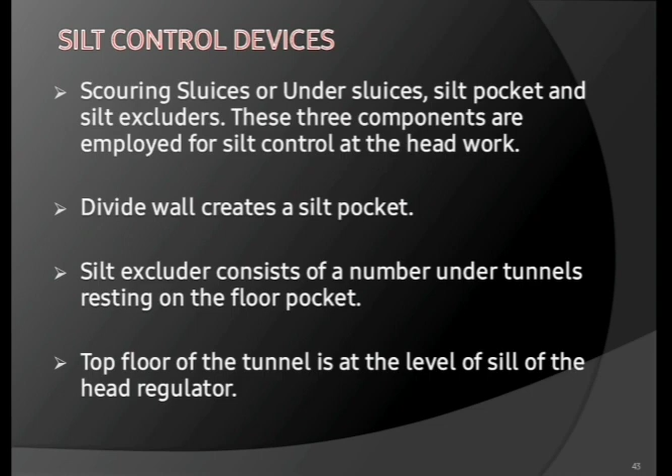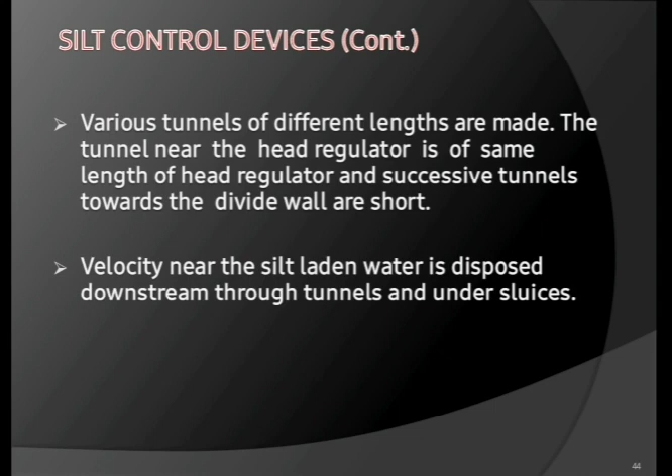Silt excluder consists of a number of tunnels resting on the floor of the pocket. The top floor of the tunnel is at the level of the sill of the head regulator. Various tunnels of different length are made. The tunnel near the head regulator is of the same length as the head regulator, and successive tunnels towards the divide wall are short. The silt laden water is disposed downstream through tunnels and under sluices. It is more clear in the figure. We will see it later. Let's complete the theoretical portion.

Silt excluder. The silt excluder is located on the upstream of the diversion weir and in front of the head regulator, as we have already discussed. Silt ejector. The object is to remove silt that has entered the canal. The silt ejector is located in the canal taking off from the diversion weir at 6 to 10 km in the canal reach. So it is away from the canal head regulator. It ejects the silt that has entered in the canal.

So the silt excluder is provided at the entry, in front of the head regulator at the diversion headwork structure, while the silt ejector is provided in the off-taking canal, 6 to 10 kilometers away from the head regulator, right?

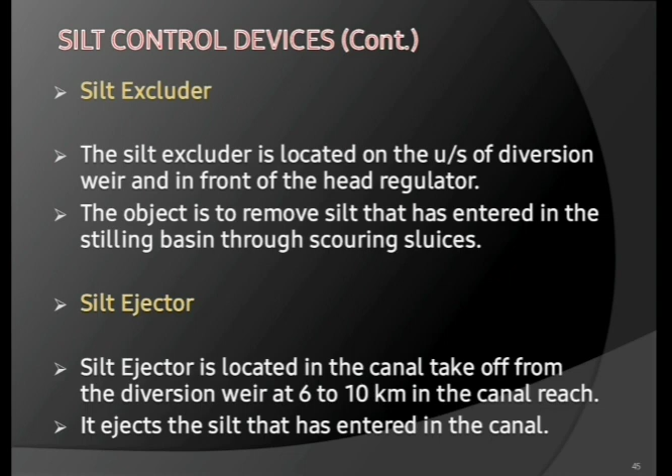So this is a sketch of silt excluder. There is a concrete floor, and that floor is divided by a number of walls, or we can say piers, right? The section between the piers is known as a tunnel, which controls the entry of silt into the off-taking canal.

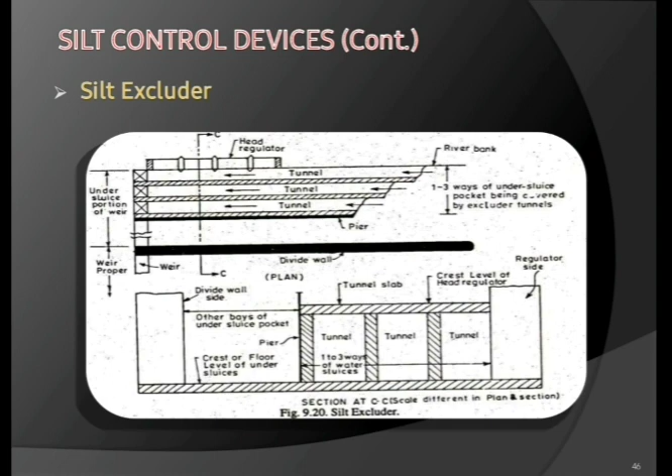So the silt ejector is different from the silt excluder, right? This is a typical tunnel design, and due to this tunnel section the velocity gets reduced and the silt is stopped at this location. In this figure we can see that the water from the main canal flows through this section, the approach channel, then the silt gets deposited or trapped in these tunnels. Silt, sand or debris are trapped due to this construction of tunnels and piers.

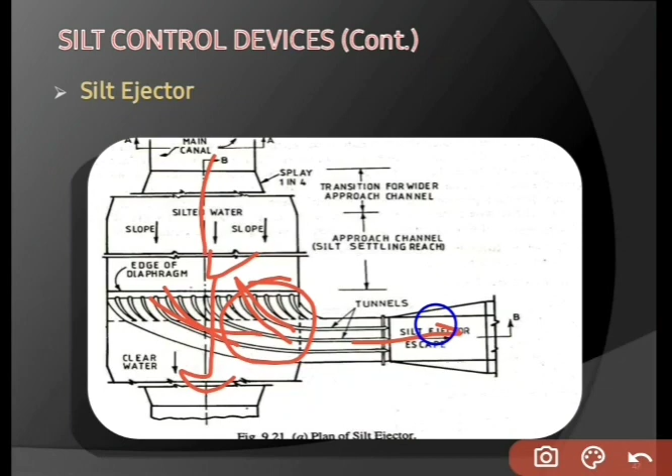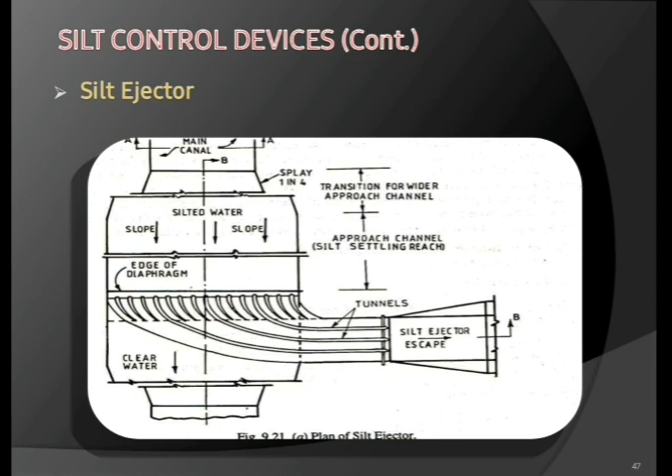Velocity of flow gets decreased, and over that the relatively clear water flows to the further section of canal. The silt deposited here gets flushed out through the flow of water from this location, and it gets disposed of from the silt ejector, right? So this is how the silt ejector works. I think this model shows a very good view of the tunnel section and pier section of the silt ejector.

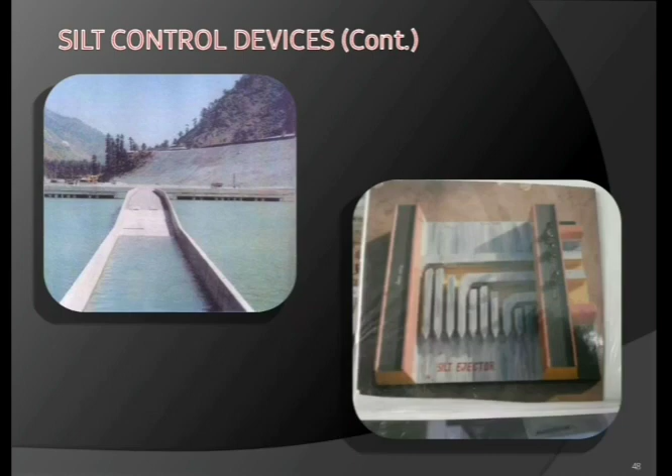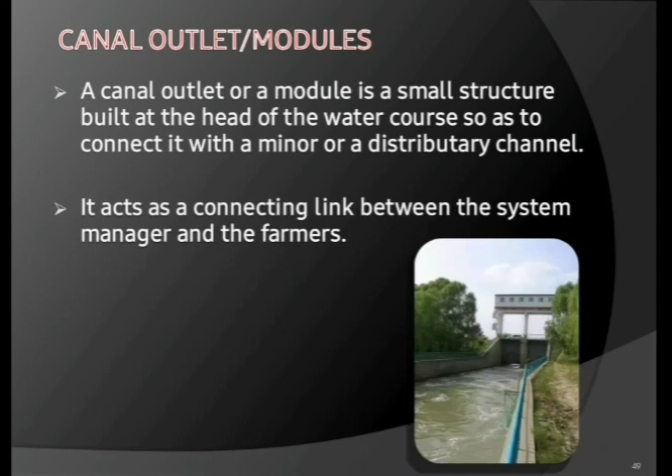Next canal regulation work is canal outlet or modules. A canal outlet or module is a small structure built at the head of the watercourse so as to connect it with the minor or distributary channel. So it acts as a connecting link between the system manager and the farmers. It is a type of connecting structure, right?

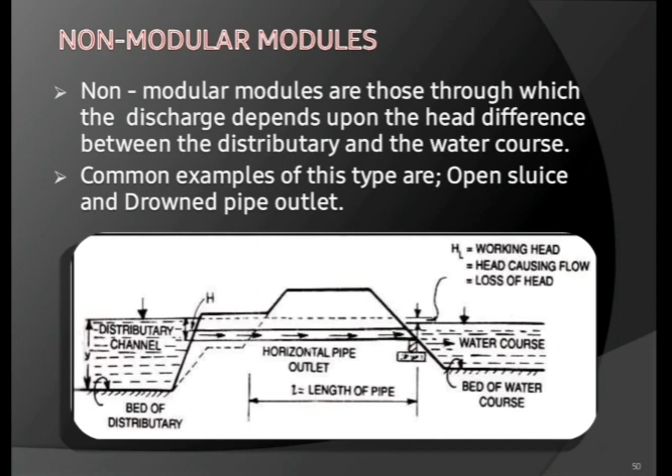Non-modular modules. Non-modular modules are those through which the discharge depends upon the head difference between the distributary and the watercourse. Common examples of this type are open sluice and drowned pipe outlet. These small structures are constructed in distributary and other minor canals. It is a pipe-like structure, I can say.

Next is semi-modules or flexible modules. Due to construction, a supercritical velocity is ensured in the throat, thereby allowing the formation of a jump in the expanding flume. The formation of hydraulic jump makes the outlet discharge independent of the water level in the watercourse, thus making it a semi-module.

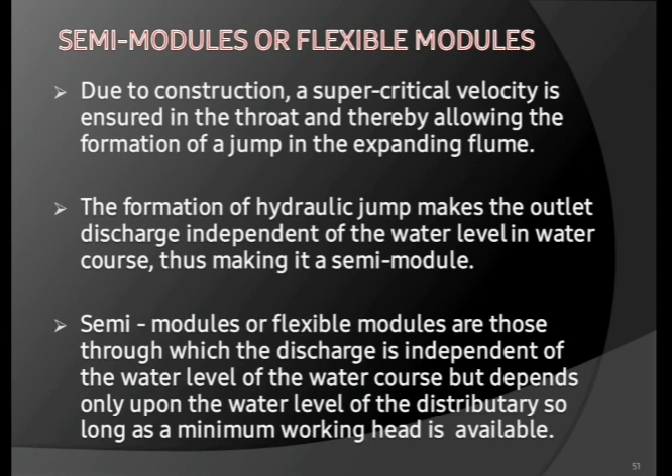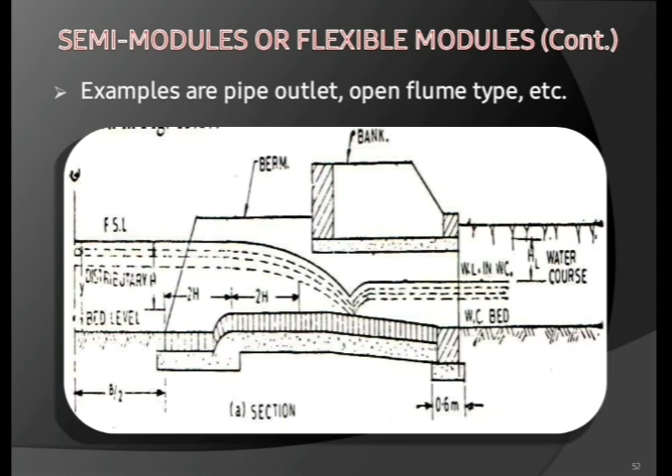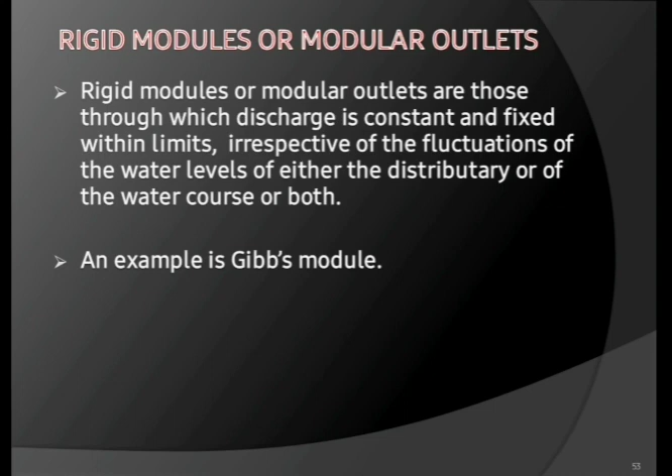Rigid modules or modular outlets. Rigid modules or modular outlets are those through which the discharge is constant and fixed within limits, irrespective of the fluctuations of water level of either the distributary or the watercourse, or both. Rigid means a fixed amount of discharge, irrespective of the water level in the distributary or in the watercourse. The example is Gibbs module.

This is Gibbs module's top view and cross section. It is nothing but a pipe outlet to divert or supply water from the distributary to the watercourse, from a small canal to another small canal, right?

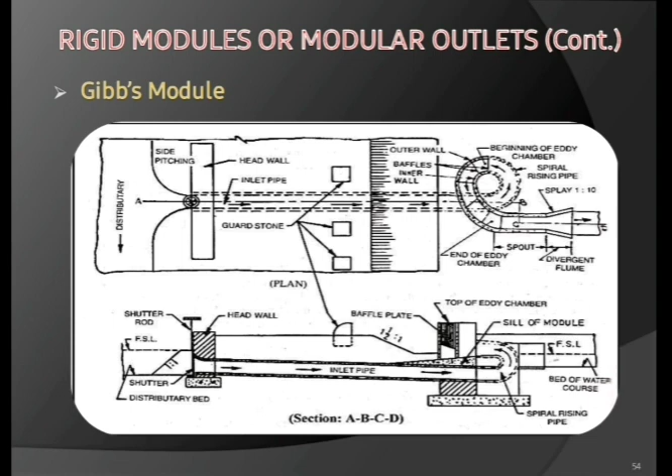So this is the end of our second video of canal regulating works.